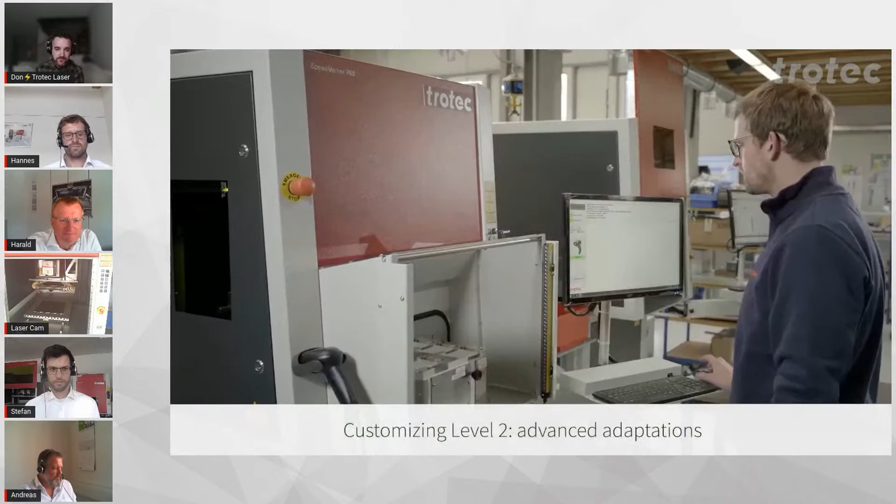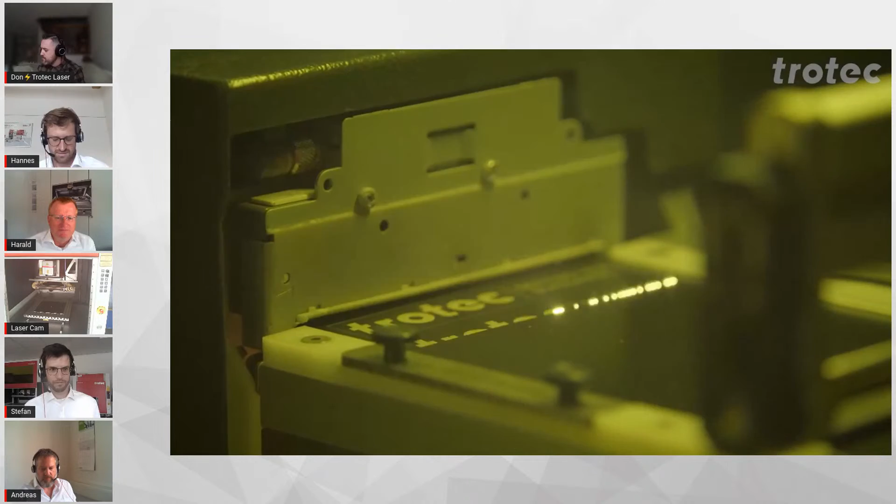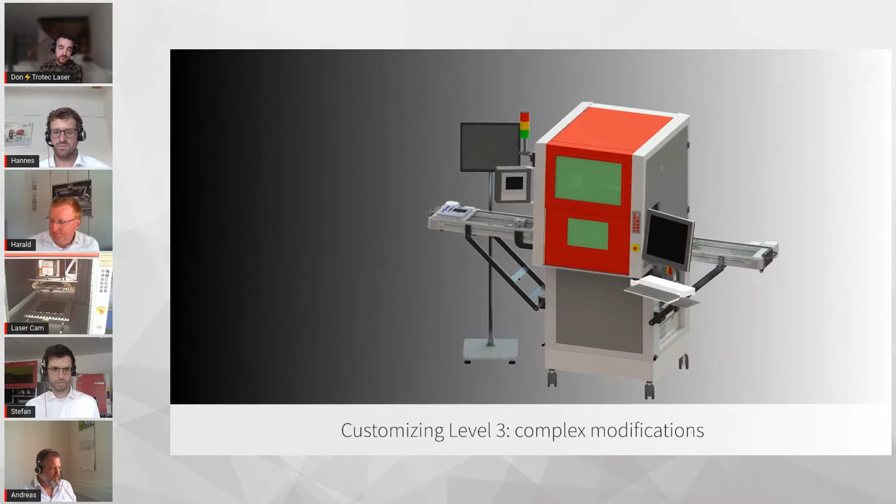But before I get ahead of myself, perhaps I'll go over to Stefan. How are you, sir? Yeah, I'm fine, I'm excited, it's our first stream. What do you do with TLAD? Yeah, so I'm the newest guy in the pre-sales department or group. The pre-sales is somewhere the link between the sales and the technicians who do the solutions in the end. So yes, and I have a laser application background. In my last job, I was working a lot with thin layers and a lot with galvo lasers. Oh, cool, fits perfectly. Yeah, absolutely.

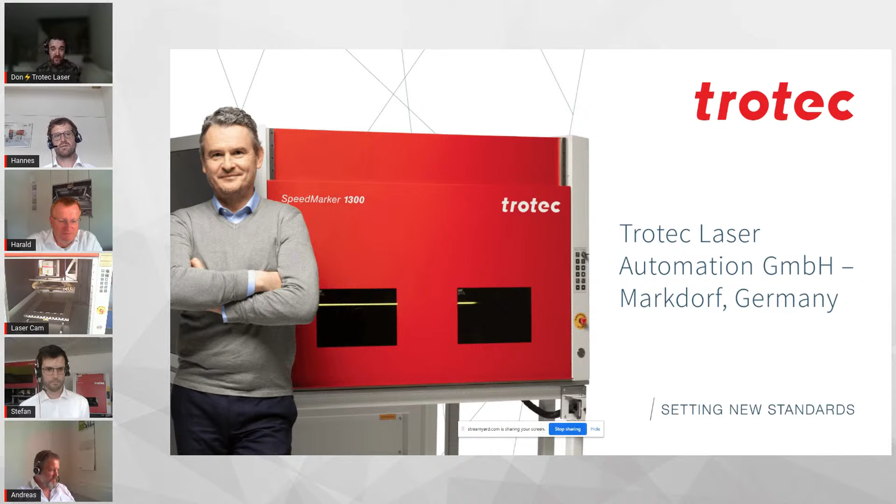Very cool. I was curious to know how you feel Trotec has changed in the time that you've been there, or possibly how what you do at TLAD has changed in that time. Because I imagine, I've only been here this will be my 4th year, and already I see such incredible change in terms of even the types of machines we see, the sophistication of the machines, the software in particular. Obviously, with Ruby launching, it's been quite a shift even in my limited amount of time.

Very last but certainly not least, I want to go to Hannes. Sir, how are you this morning? Oh, well, thank you, Don, very exciting to be here. Glad to have you. Yeah, I'm with Trotec since 2018, so more or less the same time frame like you.

And yeah, my professional background is mechanical engineering. So as this, I will close the circle from the pre-sales team. And yeah, I'm always part of the pre-sales team here at TLAD since I'm with Trotec.

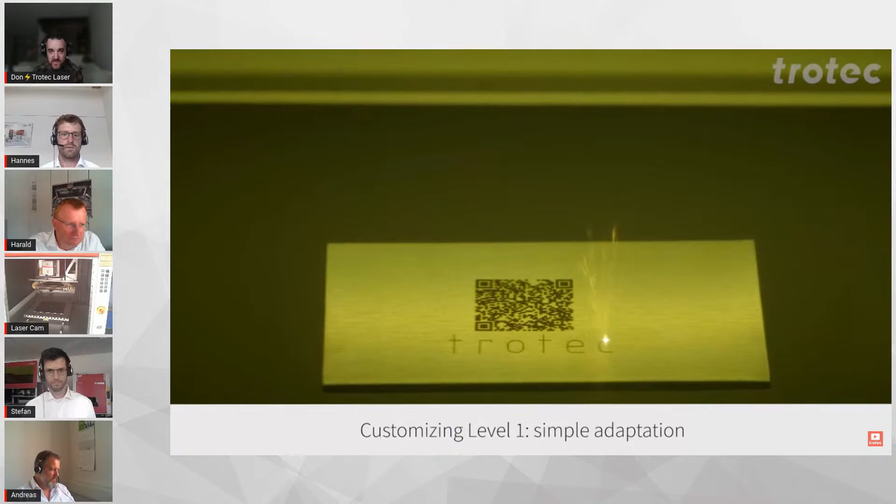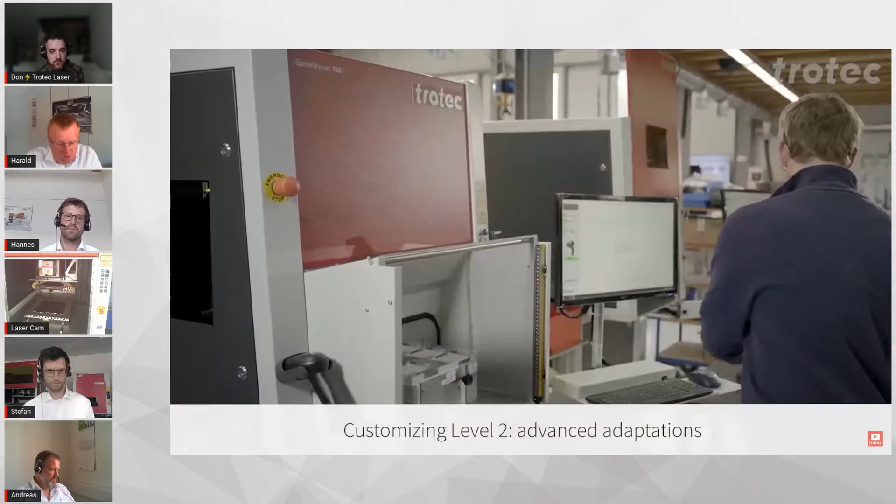That's very cool. So to give customers who might be watching an idea, it's like you talk about TLAD as you said, Trotec Laser Automation. Perhaps I'll go to Harald and ask, what do you think makes what you guys do specifically at TLAD a little bit special and different from what a customer might see at a typical Trotec showroom?

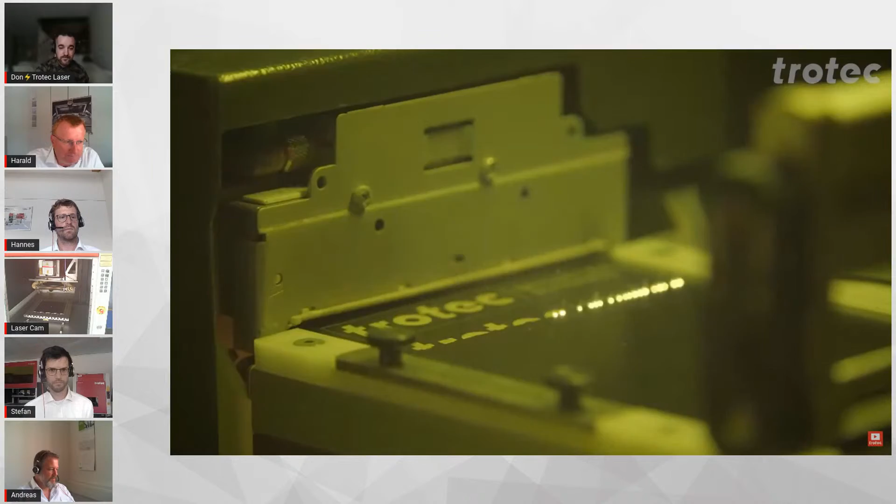Yeah, and in the typical showroom, you see our standard products, the flatbed lasers, the speedies, which have a big variety of functions and features. Here we develop and produce the laser workstations, which you see in the videos, with the galvo scanner technology. We are specialized first in developing the standard product, but then also customizing the product to special customer needs.

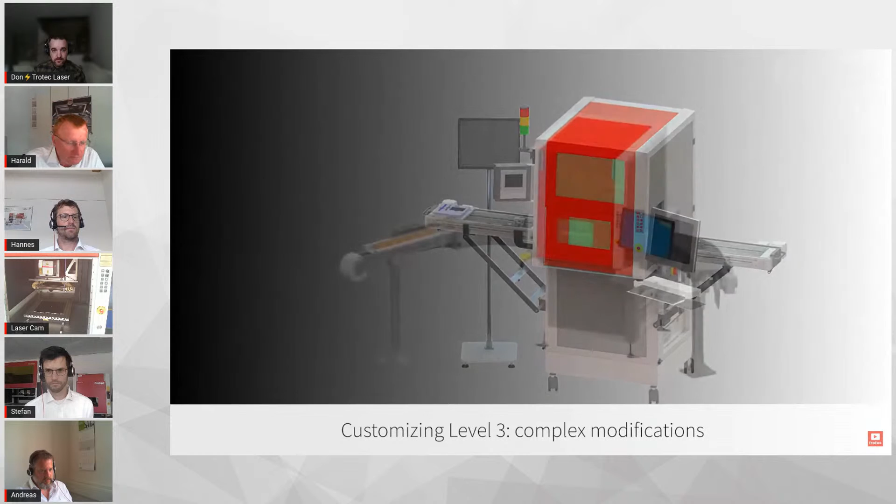This starts with simply the fact that if for some reason the customer wants a blue machine, we can recolor, or get the sheet metal in blue or whatever. But this goes on with lots of customizations or interfaces, for automation functions or for database connections, such as SAP or whatever, to connect and get the content of the marking transferred from the database to the laser, and then mark automatically the workpieces.

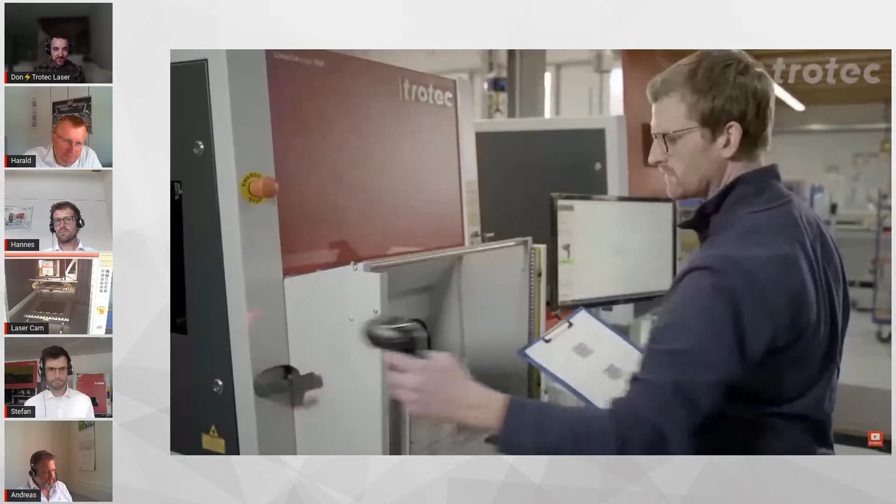So obviously I want to know more about that. Just out of curiosity though, very quickly, has someone ever asked for a blue machine? Because it seems like sacrilege.

It's blue or black or any different colors. For the workstations, the galvo business especially is more industrial-focused, and customers sometimes have defined colors for their equipment, so we provide this.

Sounds simple, but still some effort. No, absolutely. Every year we have like 5 to 10 machines in different colors.

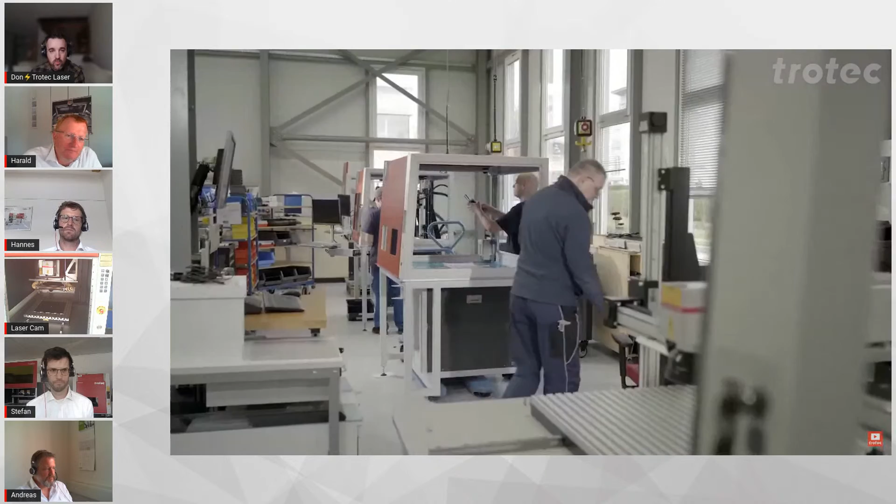I have to ask, so to get a sense of how long has TLAD been a separate or very specialized part of the Trotec Laser family? Was it always a separate offshoot from the main Austrian branch, or is it something that's developed over a matter of years into its own special thing?

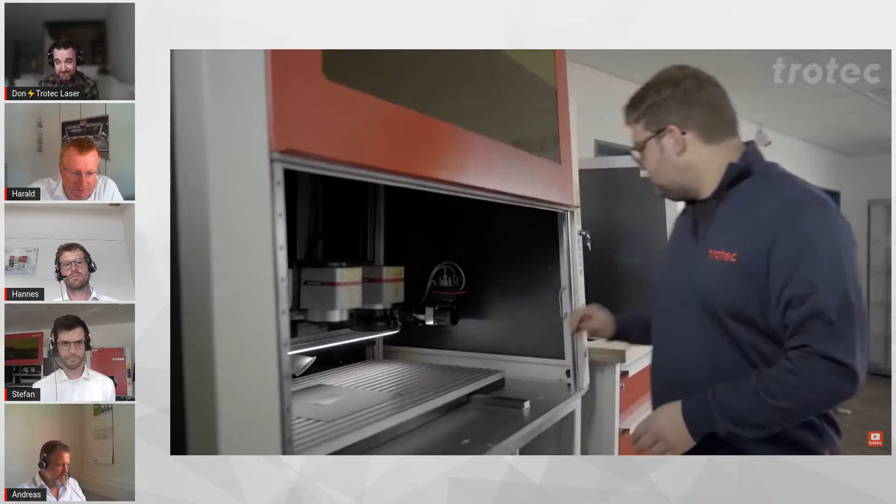Trotec now has this year its 25-year anniversary, and it started from a garage startup to now 800 people, as probably most people know. And in this growth, at some point, they got in cooperation with, at that time, what's called Baublies Automation Company.

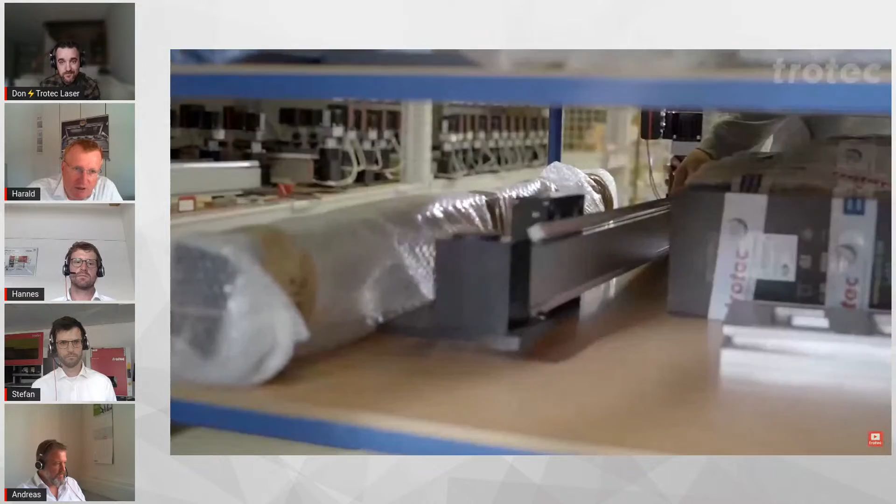Mr. Baublies founded this site here some 30 years ago, and started also with galvo workstations. Then first they had a cooperation, and then Trotec acquired this unit to add this industrial know-how and galvo know-how to the portfolio. That's very cool. Now we are since 2008 part of the Trotec community.

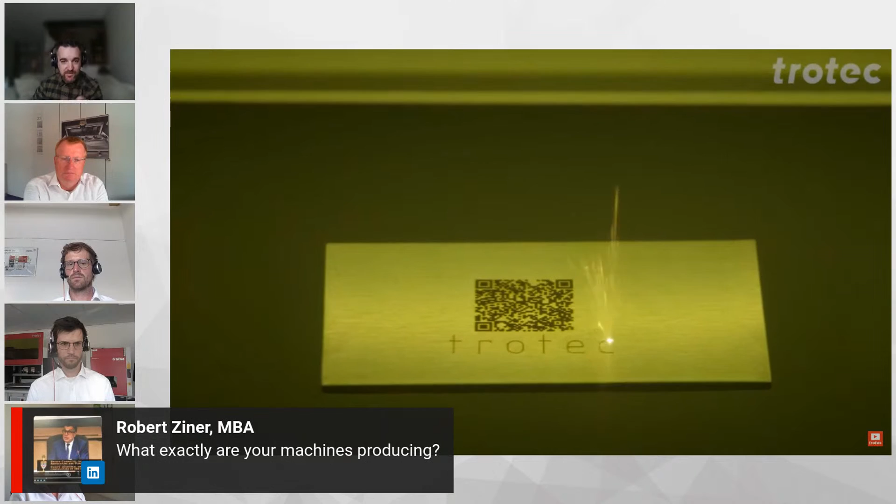A great question coming from LinkedIn from Robert, thank you for the question. Maybe I'll ask Andreas, having been with the company for quite a few years, what would you say? Each machine that you produce at TLAD is a little bit special, each integration is a little bit different from the one before. But if you had to sum up, what are the typical products, the typical marking solutions that most of the time your teams would be working with?

The typical job we have to do with laser marking is, for example, to mark some information on products for unique identifying and so on, things like codes, 2D codes, 1D codes, and so on. A lot of applications too, of course, are things like marking labels, logos, and so on for doing branding, and some more stuff like that.

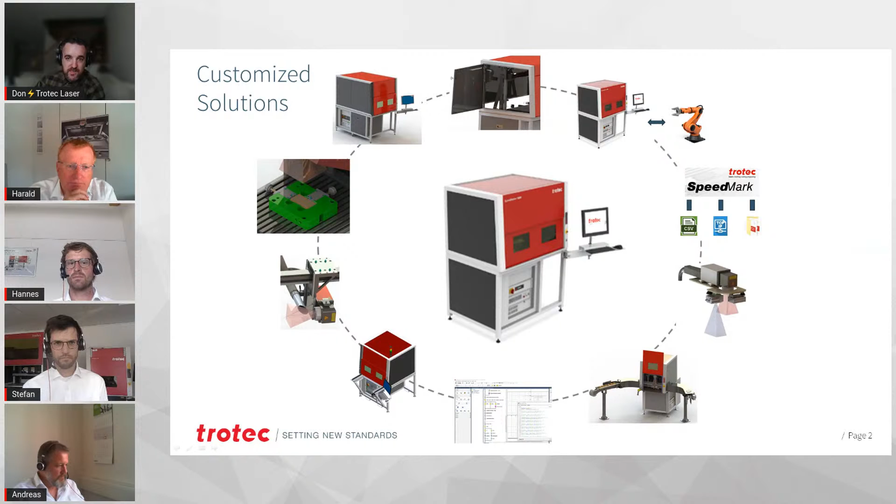Makes sense. I think what's tough sometimes with lasers, thank you Robert, is because they're so flexible. We're fortunate that galvos are perhaps a little bit more streamlined in terms of the materials they work with, but lasers can do so much that it's very often tough to answer what is the typical product a laser works with, because it's a little bit of everything. I'd love to look into some of the excellent case study pieces you've prepared for us, I think it helps answer this question. Do we want to look at some of these? I don't know if Lev can pop up some of the videos we've got prepared. Thank you, sir.

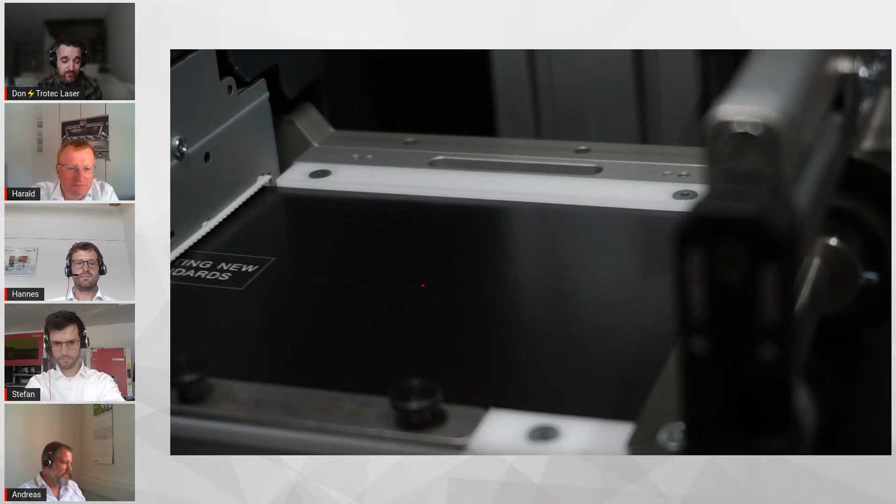So I was curious if somebody could walk me through a little bit of what we're seeing, because these are not at all necessarily going to be your typical standard. I mean, I recognize the speed marker, obviously, but then as soon as it opens up, you can tell that something is special, something is a little bit different if you've ever seen a speed marker. Can somebody tell me what we're seeing and what sort of challenge this machine was built to solve?

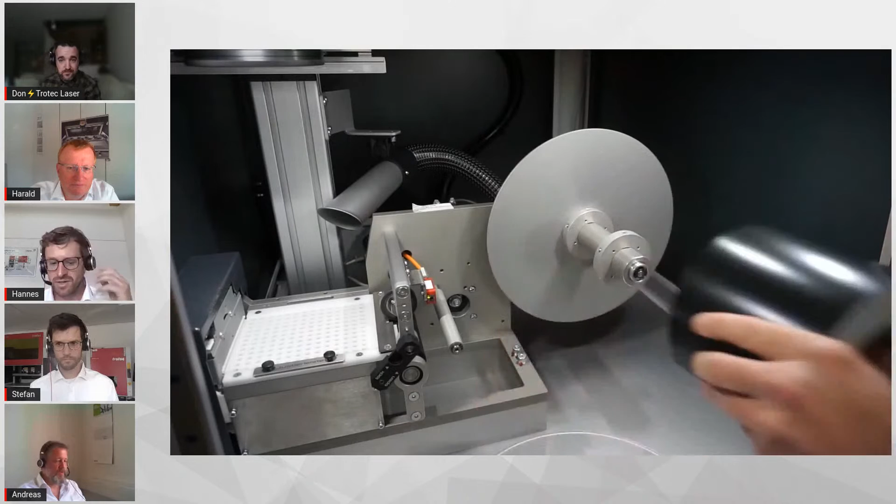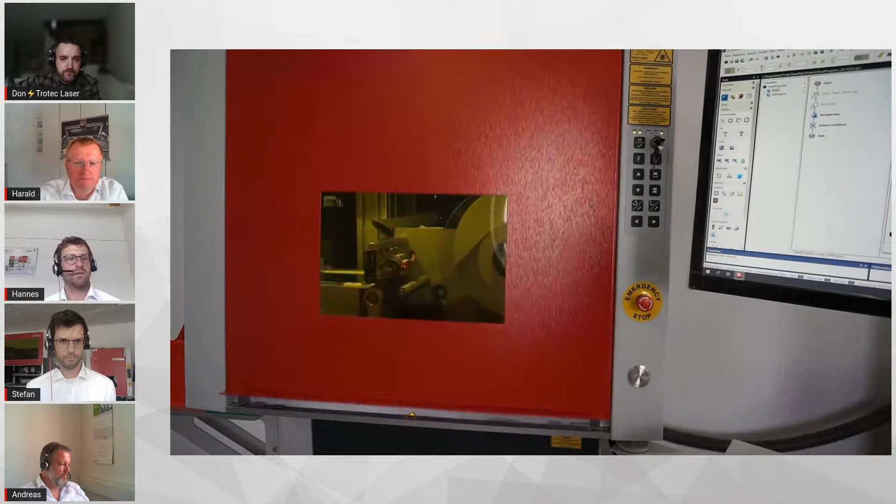And the labels are used when a direct part marking is not possible, for example. But they also break if someone tries to remove them from the part, and this is a desired property to avoid manipulation. The labels are very resistant against environmental influences. And the machine itself is a modified SpeedMarker 700 from the series line.

And there we integrated a foil transport system, which you can see in the video. I've got to say, I never get tired of seeing the speed with which the speed marker can mark.

It's always been impressive to me, but it occurs to me, I often think of the speed marker as very flexible, but if you have any sort of piece that's an odd shape or odd dimension, I imagine a custom solution like this really is the best way to go, if you need that permanent identifier, that plate, but it's on a piece that's not necessarily going to fit into the machine itself. Of course, this is a typical solution for that.

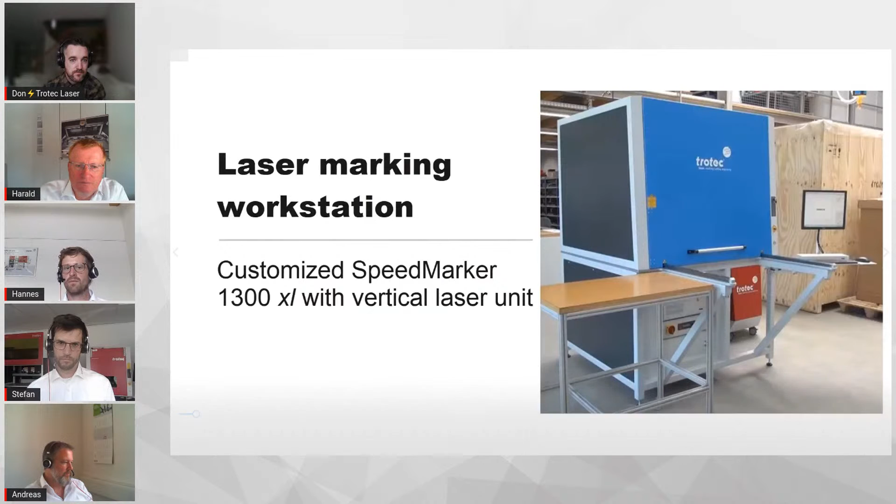Oh my goodness, okay, this might be my favorite one simply because I really love the large speed markers. Please go ahead.

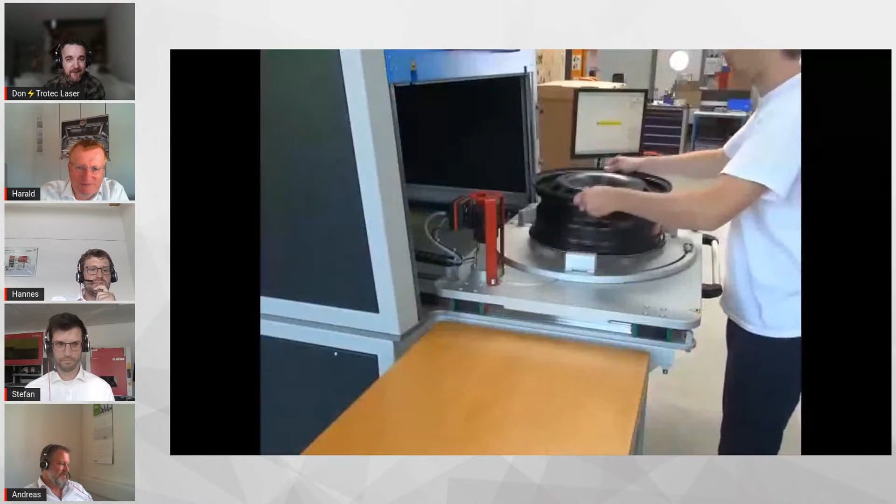So here we have a special adapted machine, starting with the size of the machine. It's way bigger than our standard machines, and we have this sliding table with this round part to be marked. So it's really easy to put in the part, mark, and take it out again.

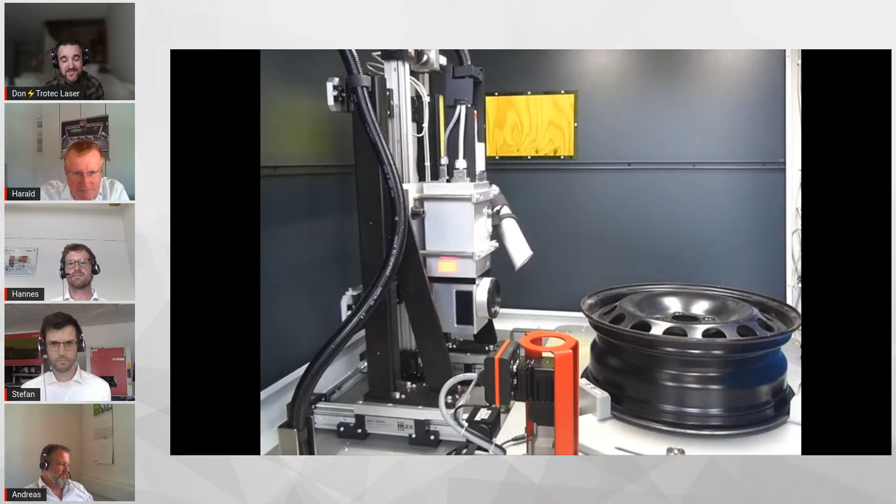That's so cool, and it's blue. Yeah, yes, and it's blue. I love that.

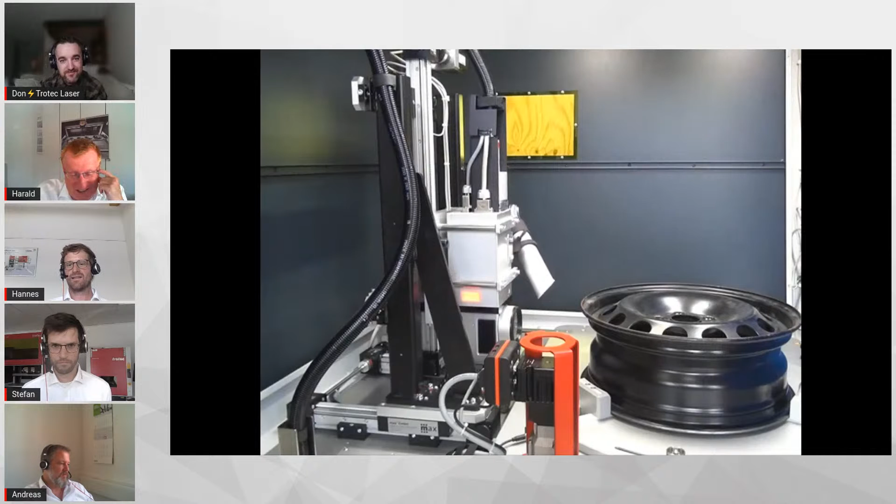Oh, absolutely right. It really goes to show the level of customization you're doing with an integration goes beyond just setting up the machine in a special way, but it really does seem to go down to a very fine grain point. Am I wrong in saying it really seems like you guys are going the extra mile to make sure the customer receives everything they need, even if it is literally just the changing of the color of the machine?

Yeah, here we see this workpiece carrier where we take the part, and also we see the laser is not horizontal but vertical, so it's adapted to the marking position. So we can bring on the mark at the required position.

I think it's interesting too that if you didn't necessarily know how this machine was set up, you wouldn't necessarily know that this is a completely custom setup. But one thing I would remind people, not only is this completely custom, but it also adds a lot of ease for the operator, right? Whoever is working for the customer just has to simply put in the piece, slide it in and walk away.

Trying to set up something like a wheel in this case, or anything that's a bit of an odd shape or odd dimension inside of a machine can be really, really taxing or difficult. So I love the solution, it's really, really cool.

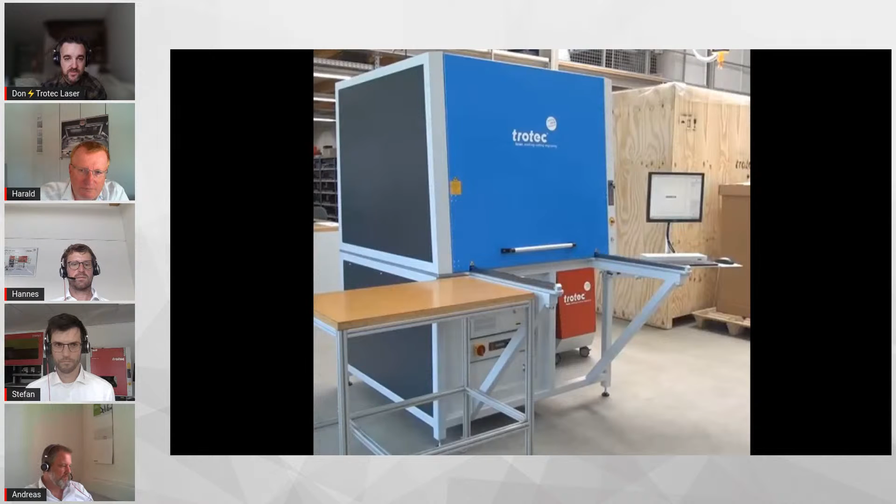I would say now we have different modules. First a flexible software, which Andreas will show us later. Then the machine itself, we have axis modules, and we can arrange them like a modular set. And then we have the machine programming and the interfaces. So there are different modules we can add up, and if one is missing, we build a new one. We're also in constant exchange with our product manager, so when we see a specific feature is demanded by the market more often, we move that customized option into the standard features of our standard product.

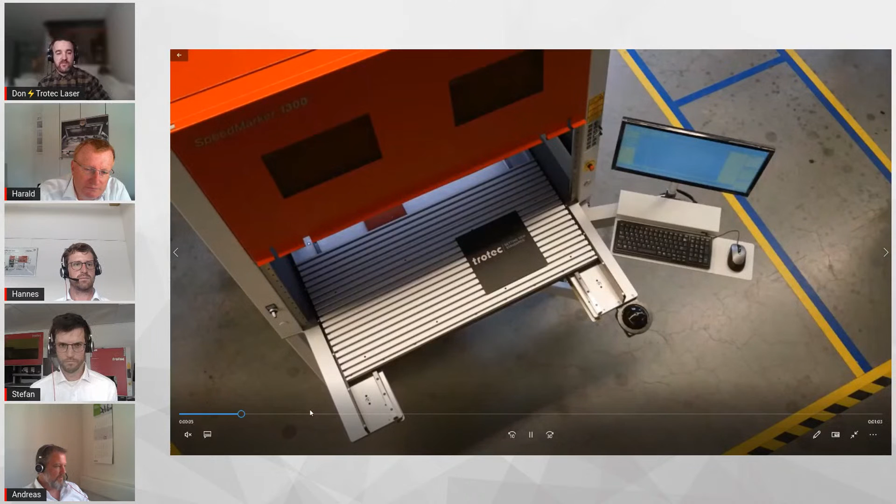Definitely, I'm excited to see that. Would somebody walk me through this video? I think it gives a great step-by-step description. Yeah, I can do this.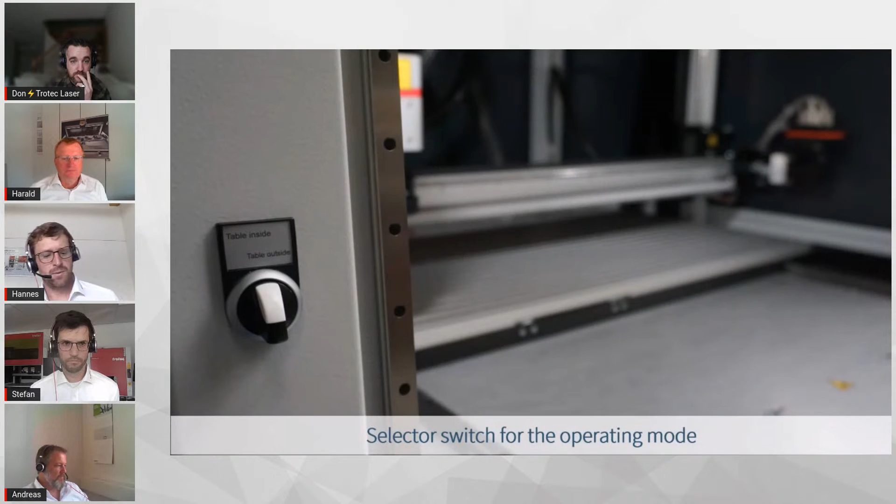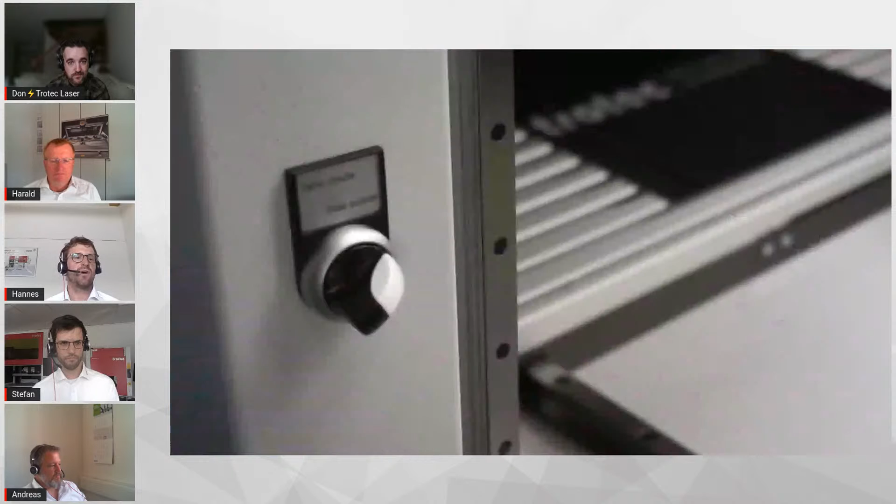This is a solution created based on the requirements of a customer. The requirement was to have good access to the machine, but also a table that's extendable. In the end, we modified our standard SpeedMarker 1300 with a cutout in the machine tabletop, and equipped the machine with two operation modes: working or operating the machine just inside, or operating it when the table is moving out of the machine.

That's cool, a good example of a customized solution introduced by a customer's need. I'm curious, Hannes, does it ever happen that a customized solution, or something that began as a custom solution, has become a standard offer from Trotec? Has anything we've created started life as a special solution for someone?

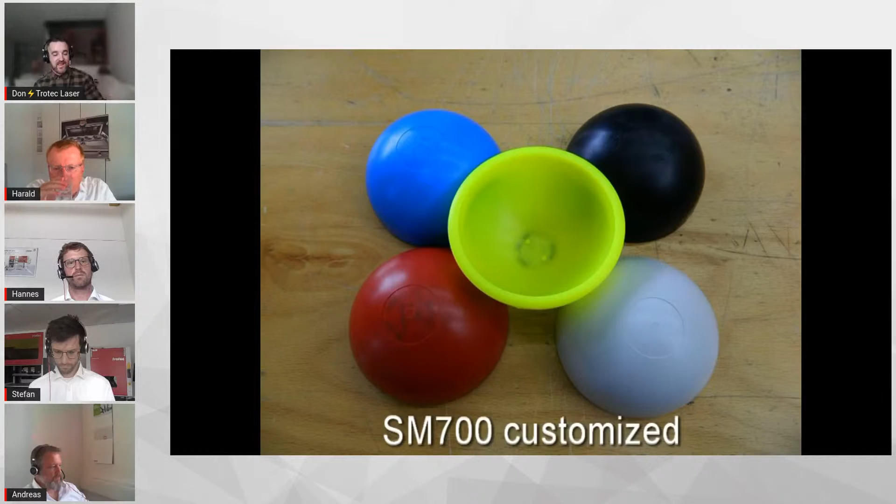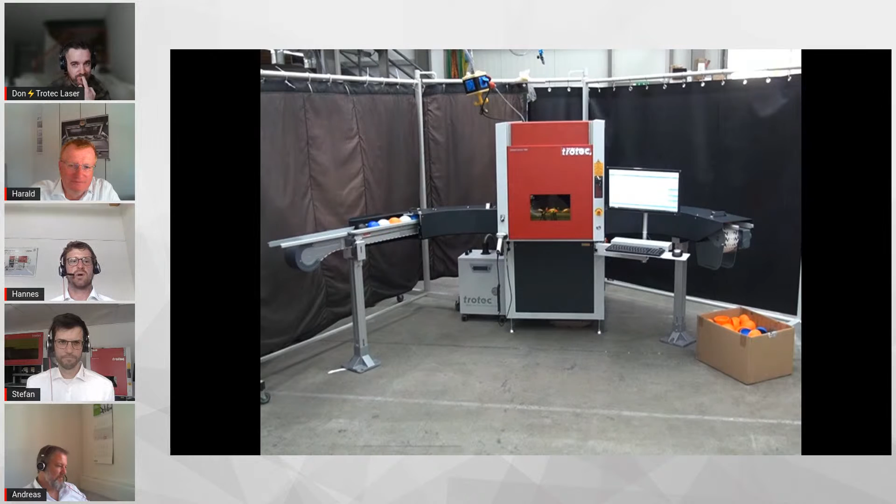I don't know of any personally, not to put you on the spot. I have to say, off the top of my head, I can't think of any, but I think yes. This basis machine you see in the video now is the SpeedMarker 700. So the result from our standard SpeedMarker 1300 maybe is to extend this into the 700. I think the first time it was done for one customer, and now we have it in our series line.

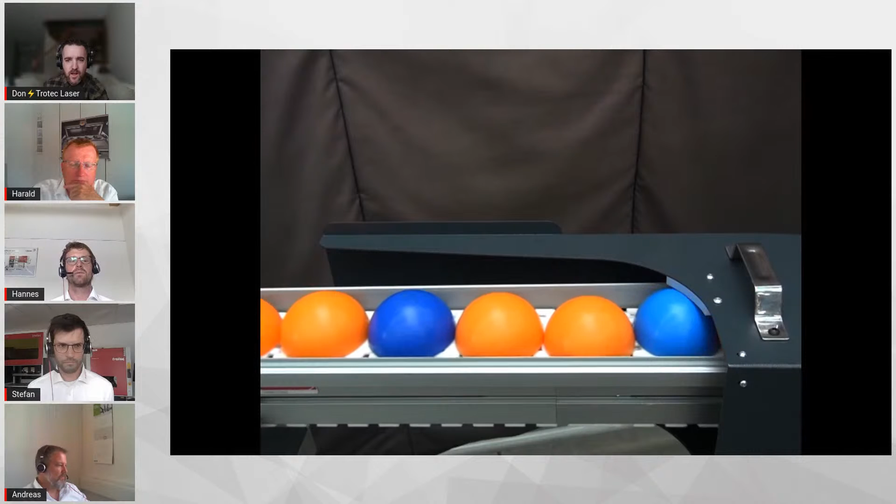I'm curious, what is it that we're seeing in the video right here? Could somebody tell me? I love the application, but was this a prototype machine, or was it done specifically for a particular customer requirement?

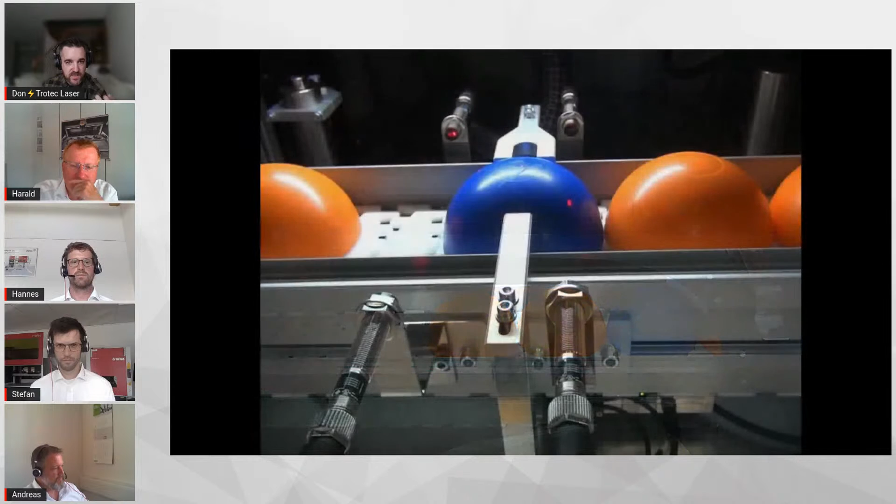This was done for customer requirement.

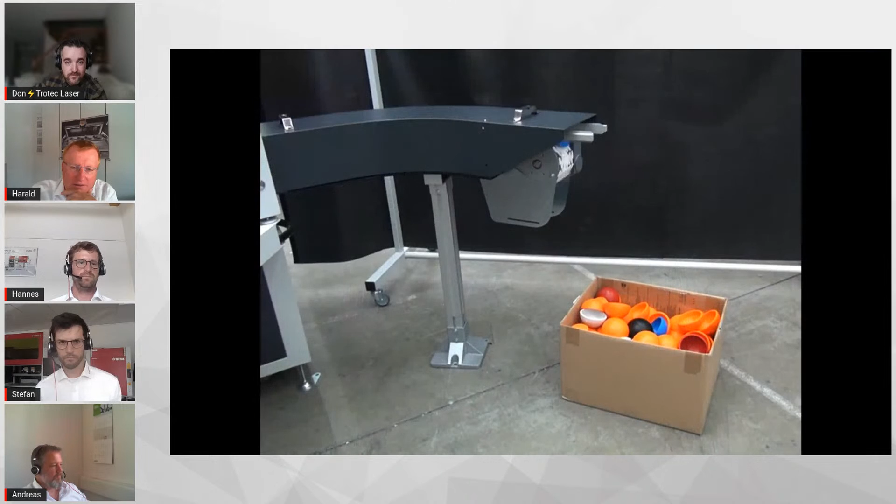Here we see the parts are on this belt. Then there's the stopping unit, and then where we mark, so each part is fixed. Now we see more detail, and we do the marking. In a fixed position, we do the marking on the exact position where the marking is required, and then the parts are taken out into the box.

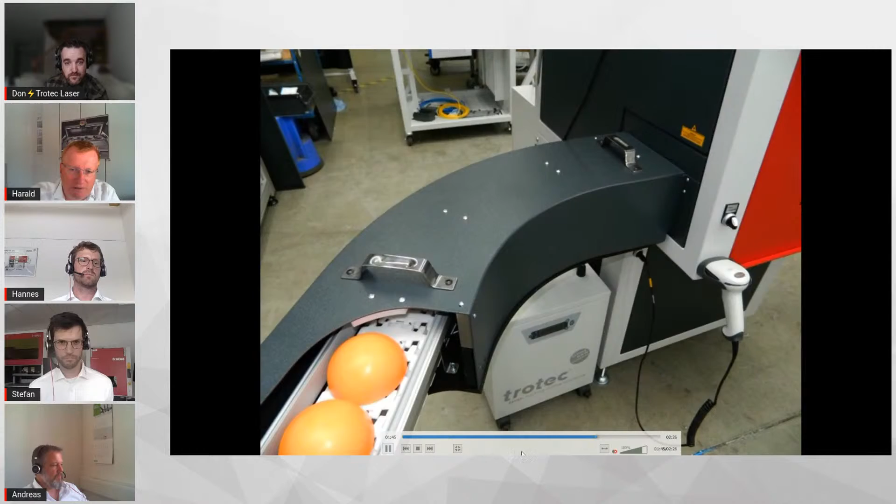Here the customer wanted to load the parts manually on this belt, and then run through the machine. The special task here is it's curved because of the laser safety, so now it's a laser safe machine. No laser light will go out of the machine, so that the operator is safe.

I believe we may have one more video.

I am excited to get to see the demonstration from Andreas, but I would ask, Andreas, from your side, how much does software factor into a custom solution? Obviously at the end of the day, the easiest thing to show is the finished machine, which is a real wow moment to see the finished workstation, right? But how much does the software factor into creating something custom for the customer?

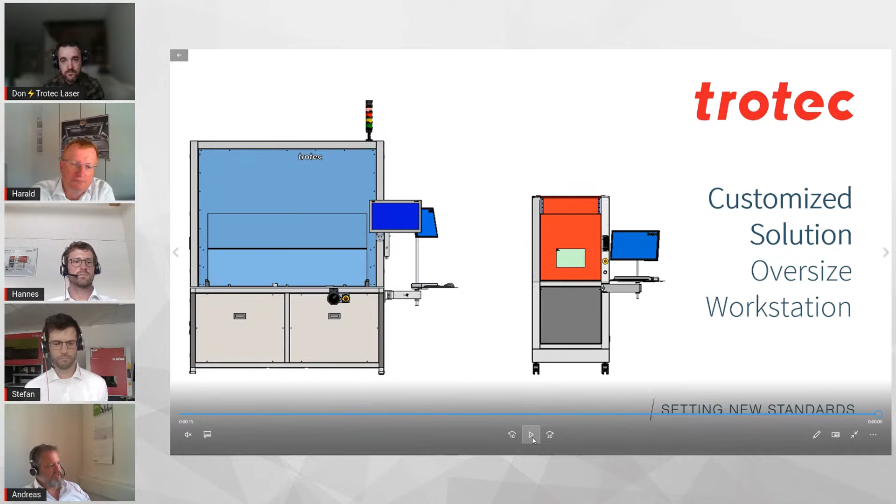The machine you can see here is a very big part, but the real unique feature we can offer with our workstation is the software, the Speedmark software itself. With this software, it's possible to do an automated process very fast for your product, and you can do automation in different ways, very fast, and it's possible to do enter screens for the end user, or to work with data and files. It's maybe almost the same size of software part sticking inside a machine like that than the part you can see here in a mechanical way.

I believe it. I would love if you could give us a demonstration of some of the custom scripting that's possible with Speedmark. We've talked about it a little bit with customers on some webinars, but I don't think we've ever really gotten to show it. So I would be really interested if you could do that for us.

For example, if you'd like to do some scripting or customization in software for machines, you first have to know for our laser machines we are using Speedmark software. The Speedmark software contains at first the marking field you can see here as a rectangle, and every content you put into this field, later it's possible to mark. Here on the left side you can do, as a normal user, your kind of scripting - that means you can do automation. So that's a quick explanation of what the software in principle is.

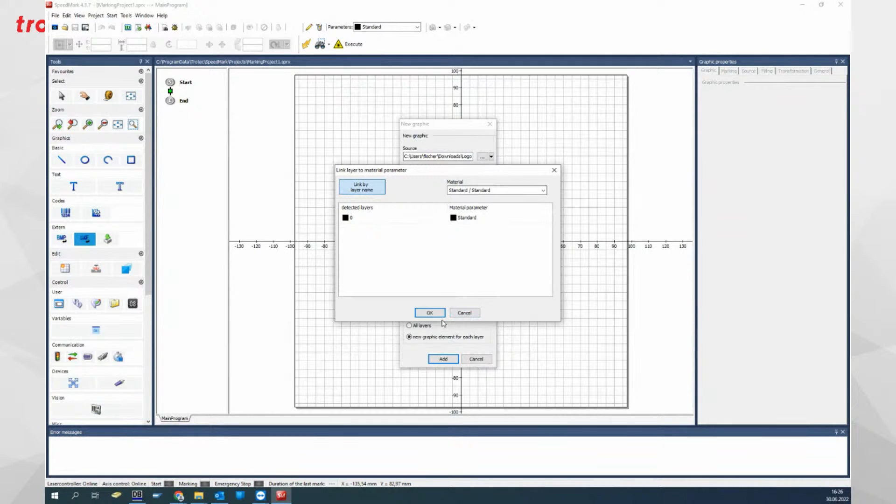So when we have an example to do, then we can use the software in the way I can show you now. For example, we can choose a kind of graphic, just choose it, add it, import it. Here in this case, we'd like to import every layer because it's just one. Now you can see, that's your graphic. You can now start and work with your graphic.

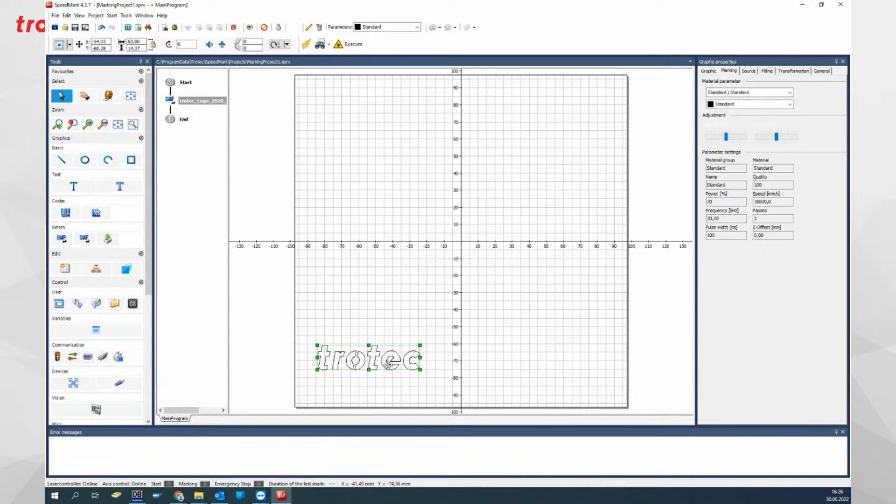The first thing you'd like to do is maybe to have it in a special size, and this could be done in the transformation folder. Now it's possible for you to place it everywhere in the marking field you'd like to have it. Now the second thing you have to do is to give some marking parameters to your graphics.

So we are going to use the standard material. This setup with speed, frequency, quality and power seems to be okay. So that means we can just choose it. Now it's working.

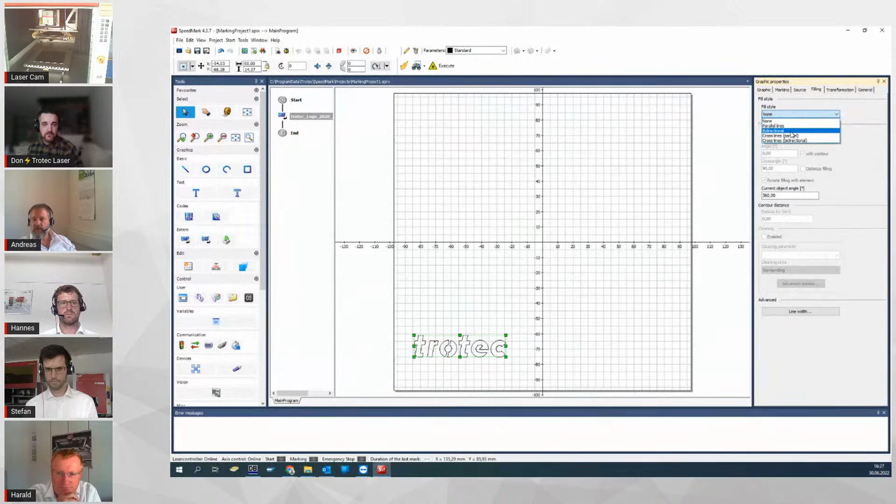The next thing we'd like to do is to fill the mark. That means we have here a folder for filling. We are doing this with bi-directional lines and the distance inside the hatch of maybe 0.2 millimeters. We'd like to have the filling without some contour.

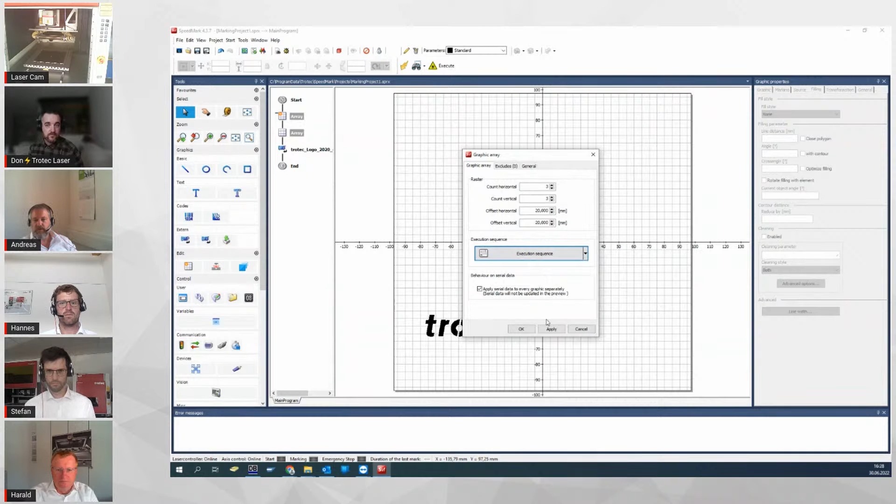The next thing we'd like to do is multiply it. Multiplying a graphic like that is easy - we are just going to create an array, and we'd like to have here, for example, in a horizontal way, 3 rows and 3 lines. I'd like to apply this, and now we can define the direction we are going to work with the graphics. So now we put the graphic in, and you can see we have the mark of the graphics programmed 9 times. So now we just have to change the distance.

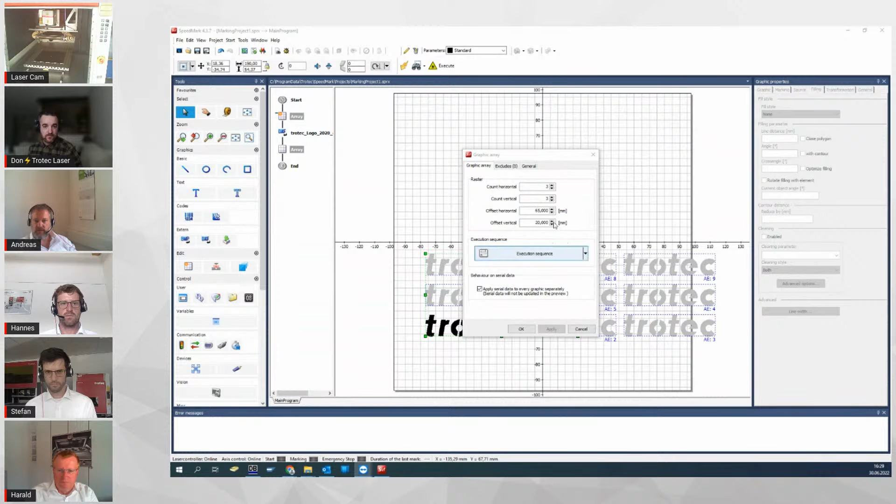And the distance in both directions, that means we can use the same distance here. So now it's possible for us to do a positioning of the whole graphics, and you can see how the script is working.

The second thing we'd like to do here is, for example, to see how easy it is to put some code into the graphics. We just have to add it. Now you can see it here. You can do a positioning of the code.

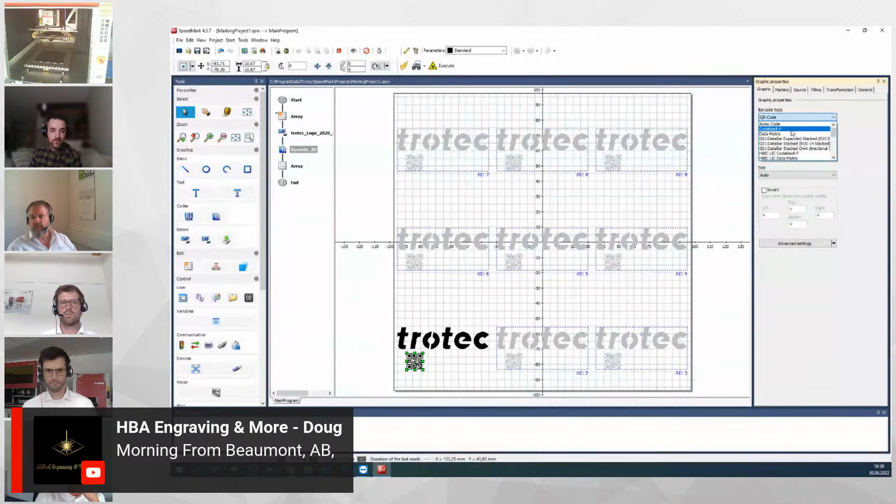So this is a QR code, Andreas, right? It's a QR code, yeah. No, it's a data matrix, so the QR code uses another coding, but it's a 2D code. If you'd like to have a QR code, it's possible to change the specs of the code. You just have to choose it here, like that. Now it's a QR code. In a very easy way, you can change your code to every kind of code you'd like to have. If we have done the implementation for that kind of coding, you can choose it.

So the third thing we'd like to do is to add some text, and the text later on should have the same content as the coding itself. So what the content of the code could be, we can define here. With that kind of input box, we have a possibility to program a small user interface in a fast way.

And it's possible to create some kind of variable to have a small data store. When you'd like to have some idea how it will look afterwards, you can just press this button for showing the dialog, and you can see what will appear later on.

So now we have an input box, and here we can say the data we defined just a few seconds ago, we can use for the code for entering or for defining the content. And for the text, we can do maybe, for example, the same.

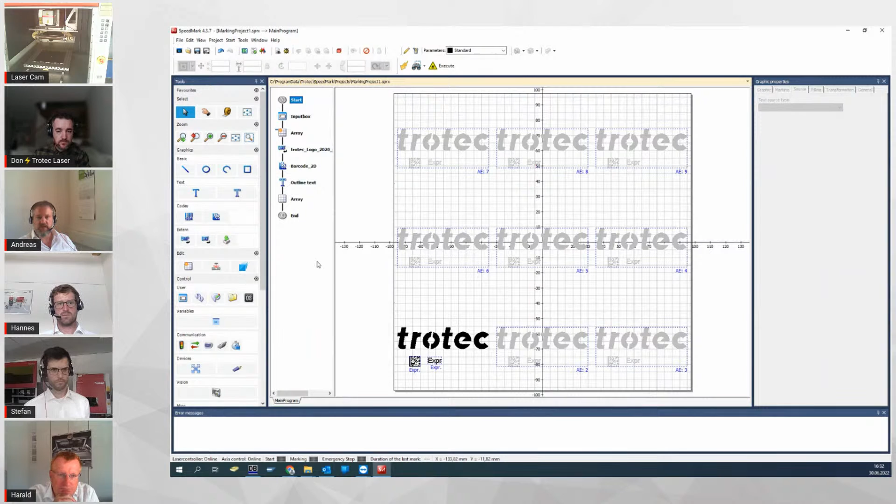So when you'd like, for example, to have an automation with our workstations, just by turning the key switch around, starting the automatic mode, after pressing a start button, for example, the door will close and open after the mark. It's predefined here in the properties for the whole script. You just have to use the checkbox for automatic program loop. When you define the passes with 0, it's infinite and we'll start an endless run.

Here you can define some internal signals for the communication with the hardware of the machine, and here it's possible to define some text message for the operator in front of the machine for what he has to do.

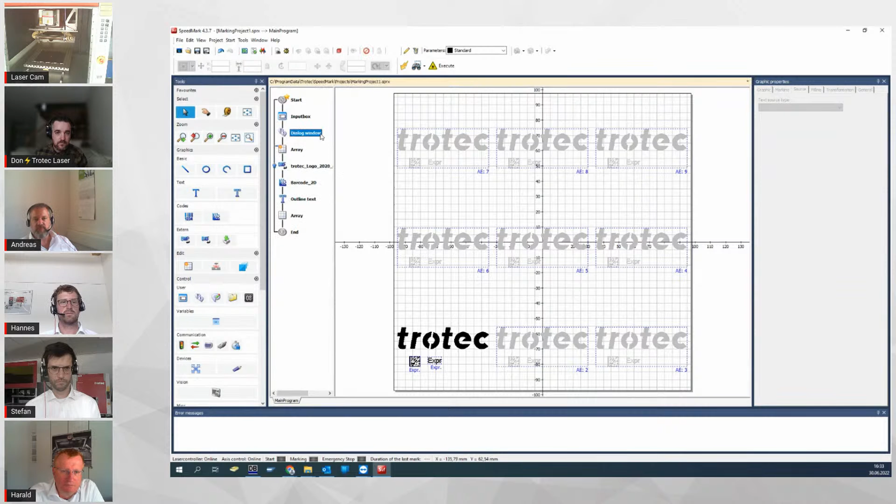So if the option is activated, you can see you created in a first way a loop, and the next thing after you have created a loop, maybe you'd like to have a decision between marking with or without a text. That means you can ask the operator something, and the answer possibilities for the operator should be yes or no.

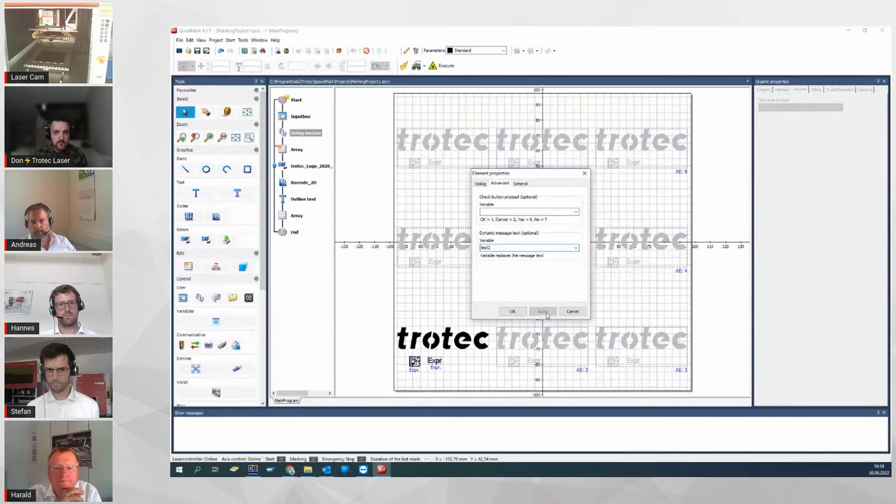And we have to do a new variable for working with the content of the user's answer. So now we can just use a kind of junction.

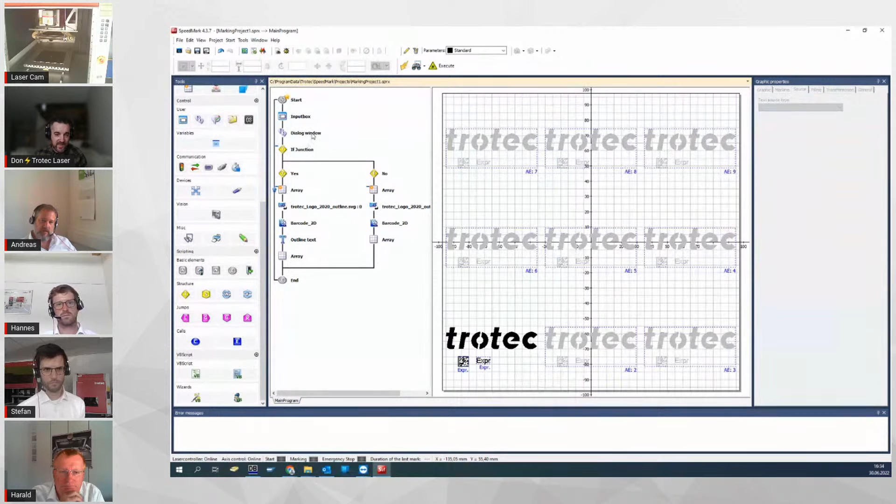Sorry, now, so I've been telling customers that the level of scripting within SpeedMark is robust for a long time. I didn't realize - so it has even custom, like Boolean logic, and things where you can set like yes or no, like if yes then this, if no then this sort of statements for an operator who's using the machine.

I mean, can you repeat just the question? Well, so what you're doing here, adding in sort of like you said, junctions and logic gates - it's blowing me away how fast you're able to set this up.

So this is something that Speedmark just does natively. This isn't a special version of Speedmark or anything like that. This is the flexibility that comes built into this. That's no special version of Speedmark, that's standard, you can do it with the Speedmark software. Wow. With every machine we deliver, the Speedmark software is installed. You can do that.

If you are trained using the scripting, it's possible for you to do that script or that kind of scripting on your own.

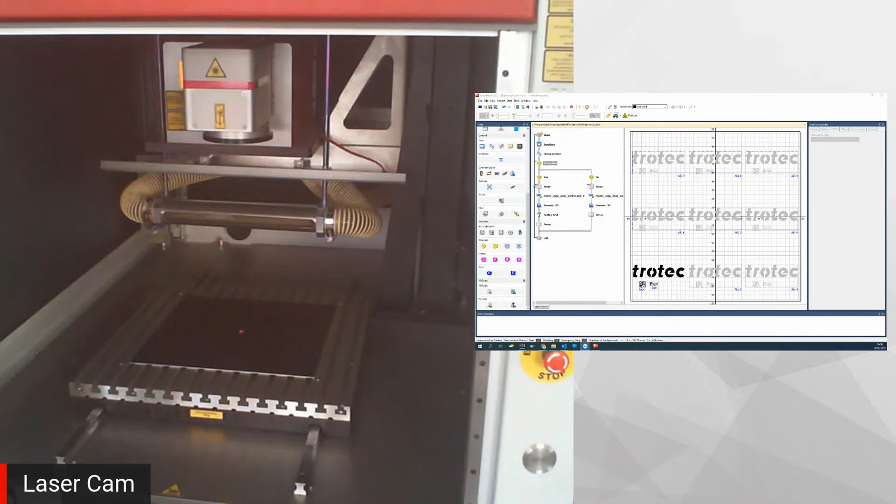And now you can see we just finished the script, and maybe, for example, for this show, that's all we had to do. And now on the machine, we just need to start the script again, and the moment anybody turns this key switch around and presses the start button afterwards, the marking we programmed the last few seconds will start, as you can see here.

So now we have to enter some content for the code, as we'd like to have it as information from the operator.

And now you can see how the 3 graphics, or the 9 graphics we used for our sequence, are going to be marked. Wow, just a few seconds and it's finished.

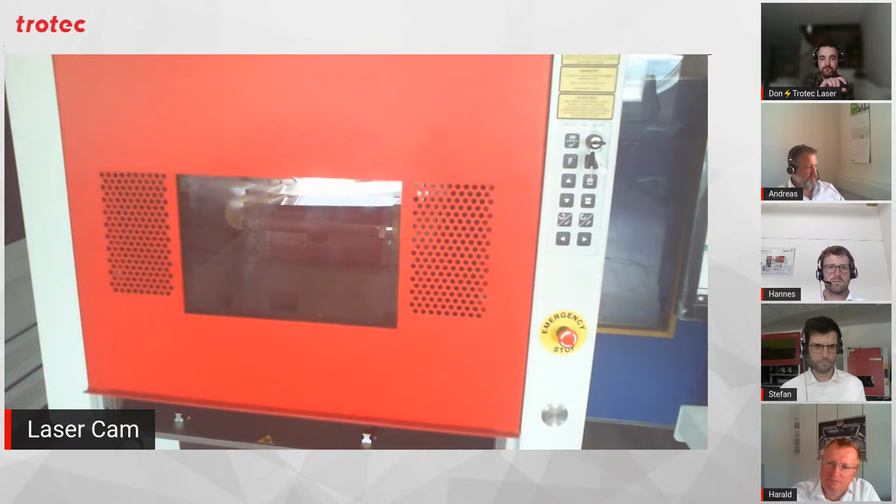This might be a silly question, but the codes, the 2D codes that were replicated across the array, could you set a different result for each one, a different outcome?

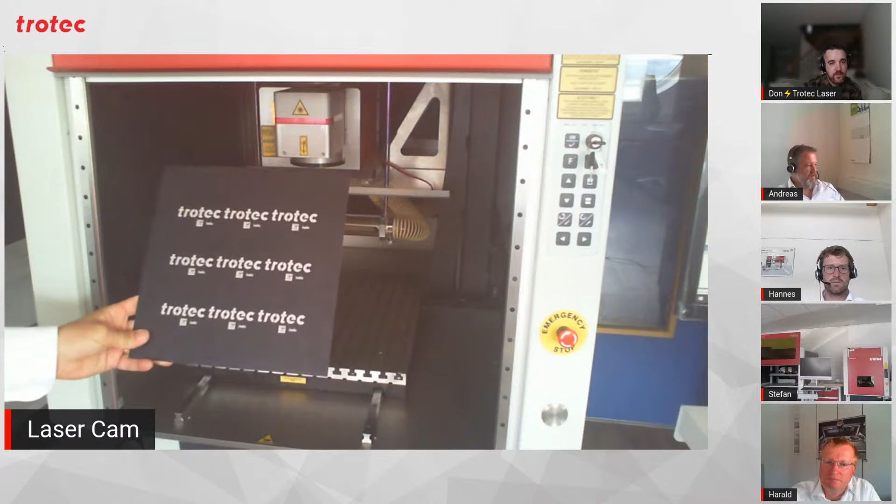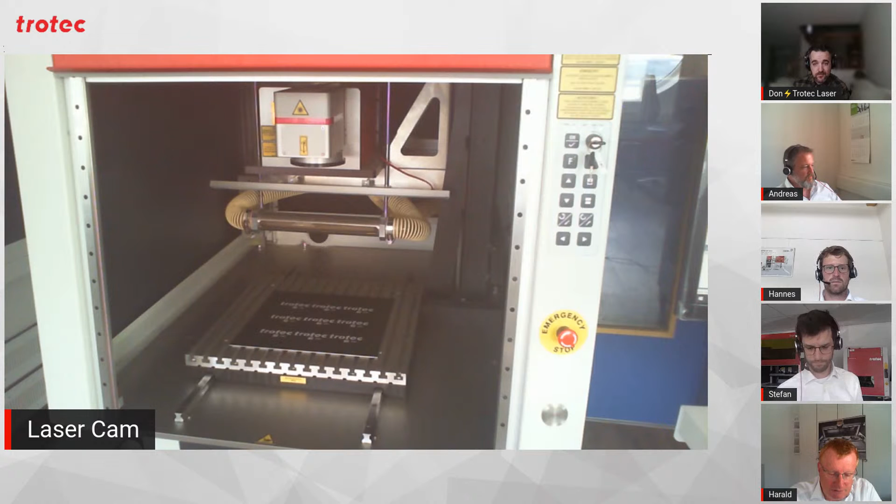Yeah, of course. It's possible to use a kind of serial file, and for every code you can use a different content, or the same content for every code - even a different content is possible for each one. That's one example. You can use the data interface to get different content from your data or file system to the marking and on your workpiece, like serial numbers and other specific product information.

It's so tough to stress how much flexibility the software gives you, particularly since that's probably the best example I've ever seen. I really appreciate that, Andreas. Thank you.

What's impressive to me is that you're able to add that level of customization to the software, but it doesn't appear to be that difficult. It seems very straightforward in the way it's laid out and put together. How would you describe that flow of jobs, or the flow of steps coming down the left side there when you were setting up the loop? Is it just a step-by-step workflow for what the operator can expect?

Maybe. You can say it's a step-by-step workflow. In a simple way, you can use all the flowchart elements out of the toolbox you've seen a few seconds ago. And if you'd like to have it in a more special way, it's possible to give statements and instructions and do something like basic programming.

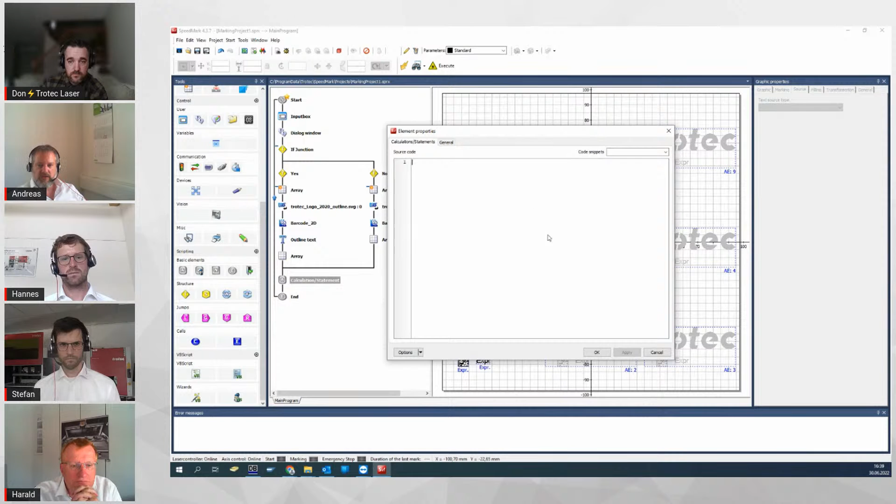You can just enter your code here, in this box, and the statement will do whatever you have programmed in it. But that's the second step. In the first step, for easy use of the software, you can just use the flowchart elements here, put them in the right sequence, and the actions will happen in that right sequence.

I think that's the thing I'd love to highlight for anyone not familiar with our software. When I first heard about the flexibility that Speedmark offers, the term coding seemed, as somebody who doesn't do much coding, very imposing. But the way it's laid out as a graphical interface, and how it allows you to quickly and easily understand it, really allows anyone to access that level of customization the software has.

We have another really cool one, I believe Lev has it ready to go - the walk around. So I don't know, Stefan, if you'd be comfortable to take us through this video, please. Yes, of course I can. So we prepared a little walkthrough through our production.

On this site here in Germany, all Galvo workstations - the Speedmarker 700, 1300 and 1600 - are all built here at our site. What you can see at the beginning is our warehouse with all the incoming goods. We have stock components ready, so if you order a standard series machine now during the stream, we have all the parts ready here and can directly start to build it.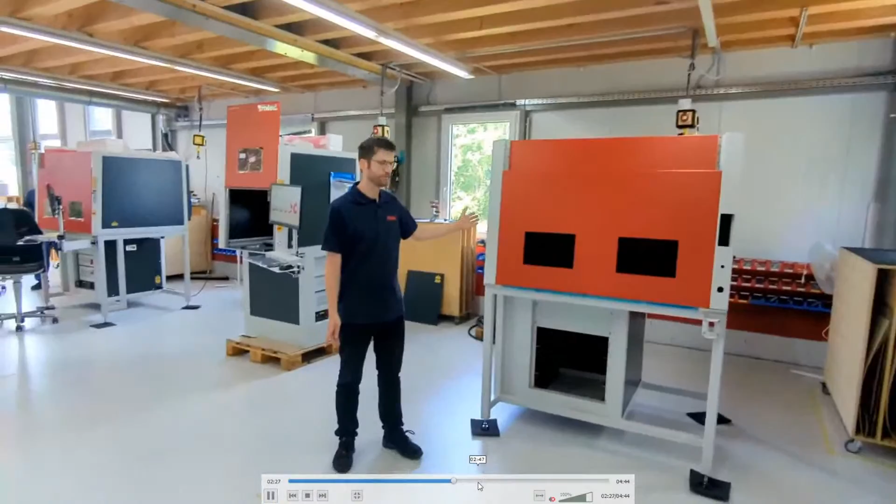The wagon with all the prepared parts goes then into the production, which is here in the second room. Here you can see the frame like we get it from the supplier. This is a SpeedMarker 1300.

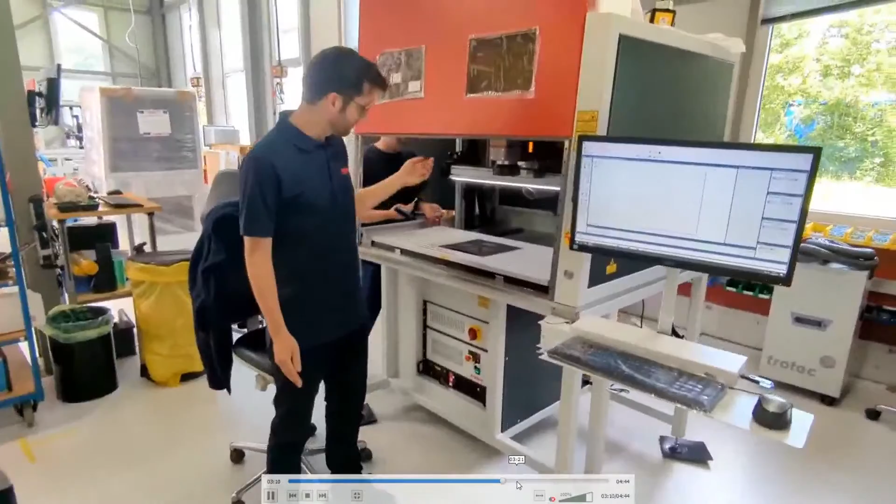In the mechanic production, we build the machine, so it's the integration of the laser that comes pre-built, all the mechanical parts, a lot of wiring, and if all that is built together, then comes the startup, and we do the calibration of the galvo scanner head.

So we need to calibrate the scan field so that every marking comes exactly where it's supposed to be, and that the focal plane is all right. And here you can see...

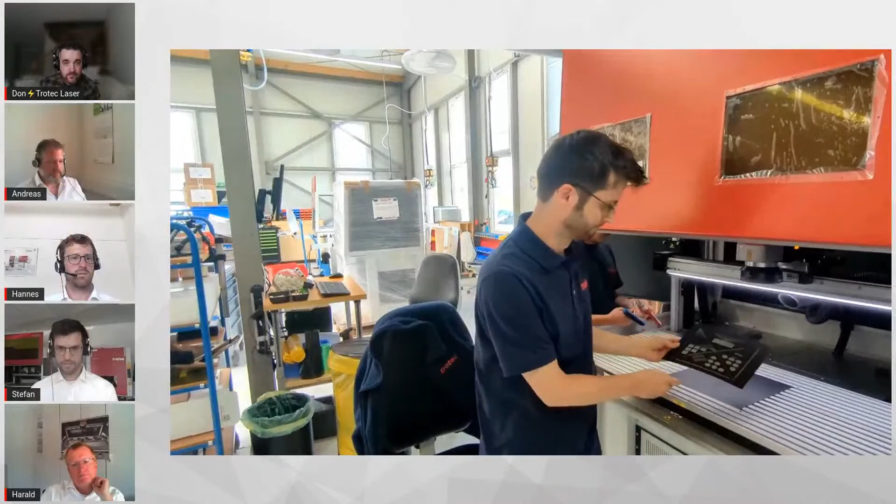It's a laser acceptance pattern that we laser at the end to prove that everything is set up in the correct way. So then each laser machine has its own laser lens correction file that's generated here. The lenses come with a little difference, every lens is different, so we just make sure that it's lasering as good as possible.

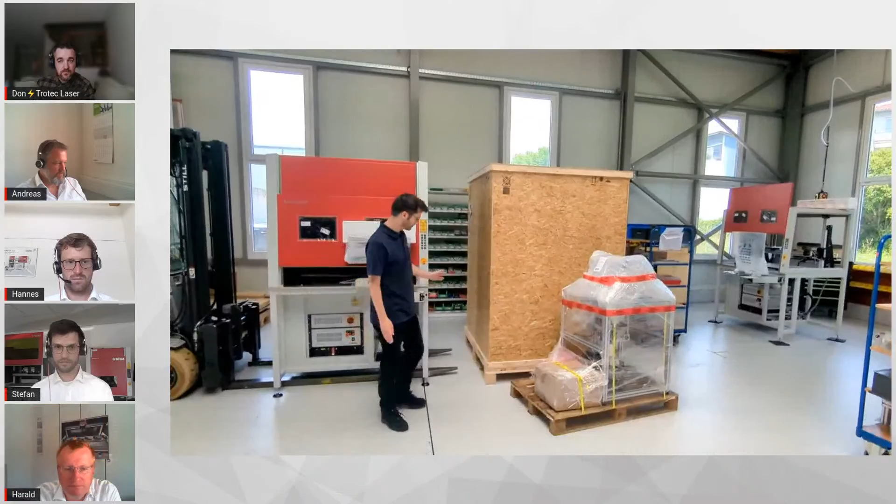Then there's some final testing like endurance tests, and then we directly come to the last part, which is the packaging. So the laser is put in the box, and every galvo laser workstation worldwide comes from this way and is going out of the store, and maybe your next laser workstation as well.

There's a couple things I want to ask you about, but I didn't realize that it was, as you say, sort of one person following a machine through every step of the production. That's pretty cool. Somebody has a particular ownership of that machine kind of from start to finish.

How important would you say is the fact that, for all intents and purposes, the Trotec machines are assembled by hand, that it's somebody building something or assembling the parts together themselves, as opposed to getting all the pieces in and simply plugging them into the machine? You can see it right here, like say you have somebody working by hand to put that part together. I feel like that's an important part of what makes a Trotec and gives us the quality that we're proud of.

Yeah, so it has an individual touch. Absolutely, so you build it from start to finish. The whole machines are designed and developed by Trotec to our plans and produced by our drawings, but we are the assembly side, let's say. We get all the component parts from our suppliers and then build the machine.

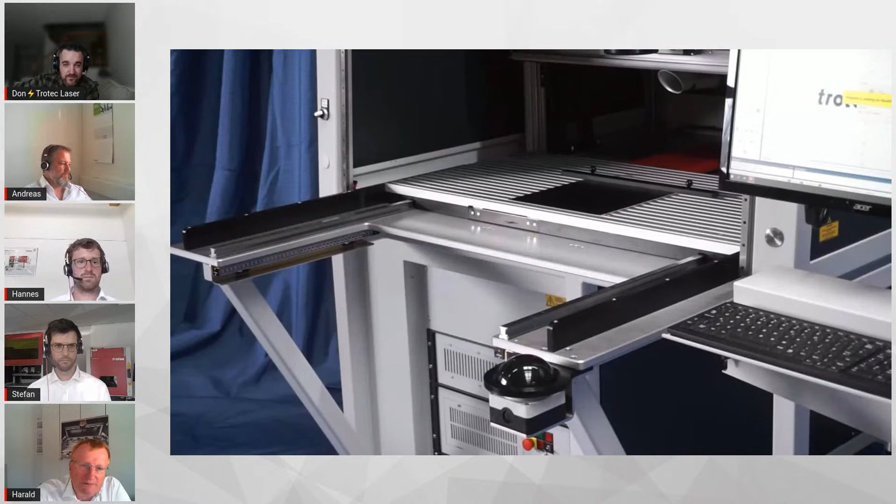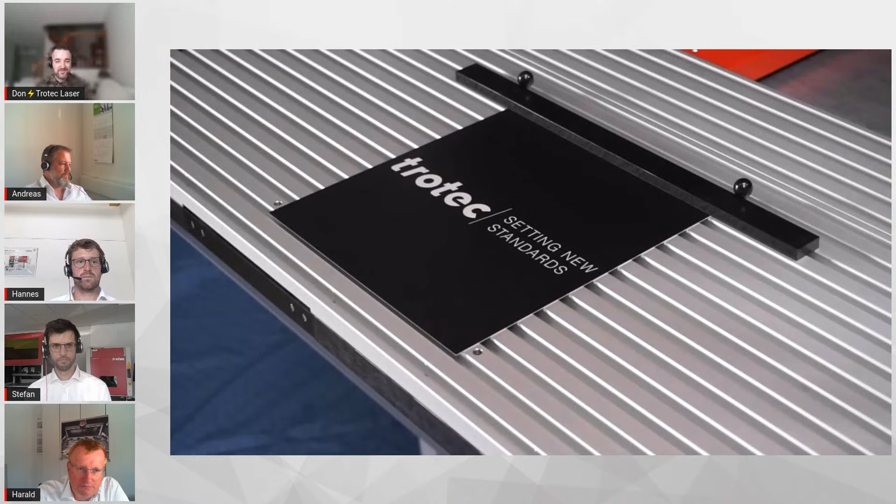So I'm curious, when it comes to a really specialized system like this one, how does training of customers typically occur? Do we do an online conference where they'd have a chance to chat with the team at TLAD to get an idea of how the machine works and is designed? I guess as you're doing the integration you'll have conversations with them, but do operators typically have a chance to receive training on the very special way that their machine is set up and how it runs?

We first of all offer trainings, and for real special machines we actually require training here before delivery. We call it pre-acceptance test and training. The customer comes over, we run through the process and his application, checking if everything is like it was defined in the quote, and then the customer gets their training and acceptance, and then we do the delivery. That's really cool.

Are there particular industries that TLAD would most often be catering to? Without necessarily getting into any particular names of businesses, I'd be curious to know, maybe Hannes, are there particular industries that would more often than not need a customized machine versus a standard Speedmarker?

I think the strength of Trotec is to be present across the whole world, and with all our 17 sales organizations, we get such a big variety of demands and applications. So there's really a broad band of applications and industries where our customers are today.

We were talking about this earlier, but because lasers are so flexible, it's always tough to say what the typical laser customer or the typical laser product is. They're kind of all over the place, but that's part of what I love about lasers, that flexibility to work with so many different industries and so many different people.

Is there anything you're currently working on that you're able to talk to us about? Obviously nothing in breach of confidentiality, but do you have any interesting projects currently on the go?

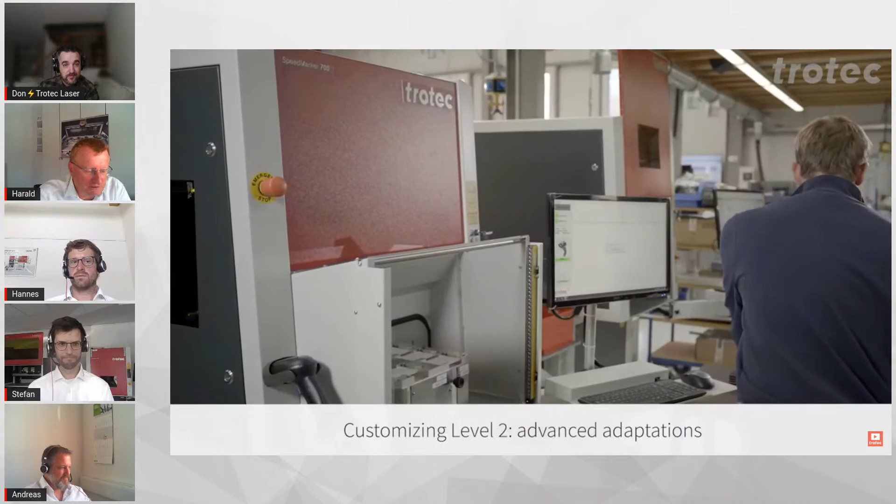Maybe the chance to explain a little more the general processing. At TLAD, with the guys we presented today, we call it the pre-sales team. We work together with your local sales organization, so the pre-sales guys support your sales manager who is talking with you about your project. We support developing the right solution for you and then offering this, so we primarily support our sales team to get the best solution for our customers.

So as a member of the pre-sales team, are you getting to work a little bit with sales guys and sales managers from all across the globe, like Trotec subsidiaries in North America, South America, Europe, kind of all scattered everywhere? Maybe the pre-sales guys can answer this.

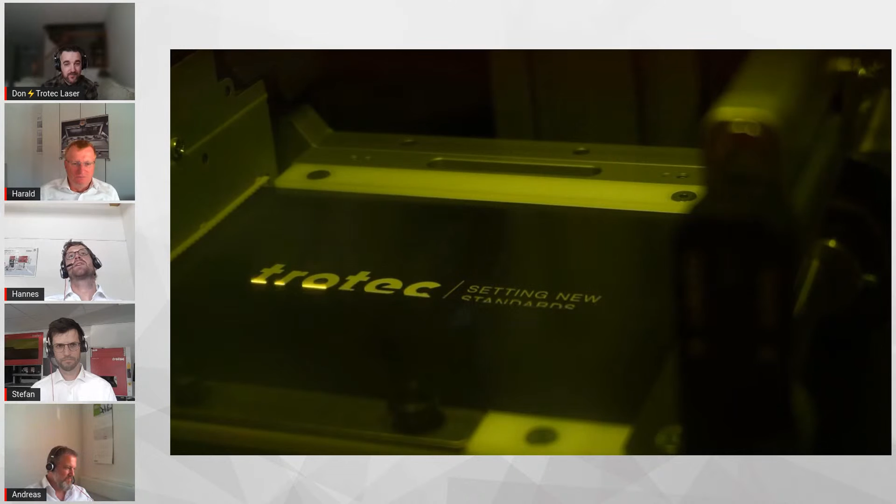Yes, we do, as we do it with Canada at the moment. But let's say the focus is on middle Europe for customized projects so far.

Makes sense. I mean, if somebody is doing something of this scale, having them more easily accessible makes sense. Obviously Europe is a big place, so traveling across Europe is perhaps tricky, but when you're setting up something like this, it really feels like you're involved at every stage. Even in some of the more custom projects, they may have to visit you before picking up the machine, so that's a really particular scenario.

We're just about at the top of the hour. I think I have maybe one or two other questions. I was curious in terms of...

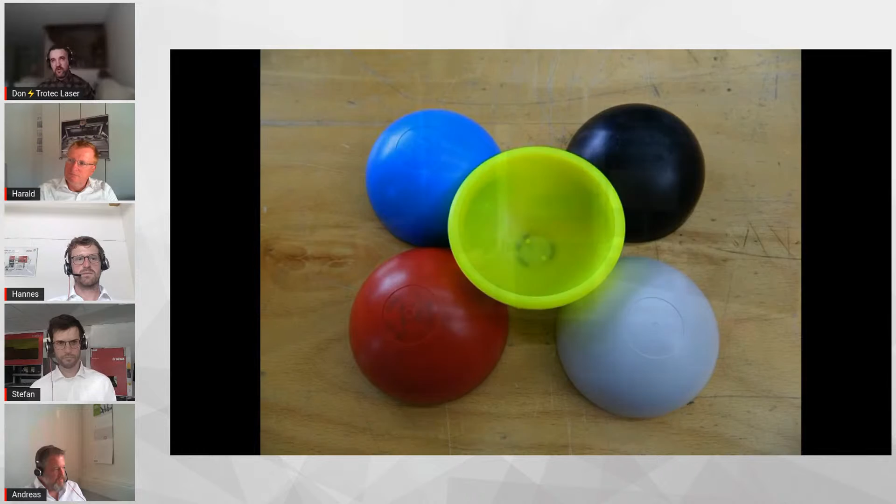Again, we don't have to get too specific, but how often are we able to solve a custom solution just with integration of Trotec parts and pieces, versus how often do we have to integrate something from a third-party supplier, like a robotic arm? That's the only one I'm familiar with, one in Canada we did with a robotic arm, but forgive my lack of knowledge on that. Is it typically that we're involving a third-party supplier as well, or do we usually see Trotec start to finish?

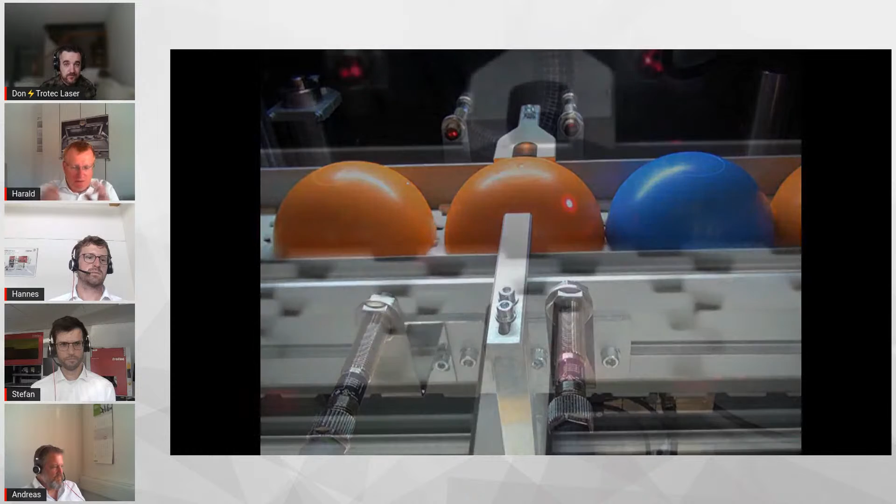When we use automation modules like a robot, or like here in the video currently the belt, this is usually not produced by Trotec. We have suppliers for these modules we use, and our task is to choose the right module, integrate it into the machine, make the whole machine run, and develop the process.

That's very, very cool. Well, due to time difference, I won't even guess what time it is there presently, but I'll thank you guys very much. I know you're all very busy and you've taken hours this week out of your schedules to work with me and with Lev to put all of this together. We really hope that in the future we'll get to do more streams with the team at TLAD. I think what you guys do is a really important part of what we offer at Trotec, and something that perhaps doesn't get talked about enough.